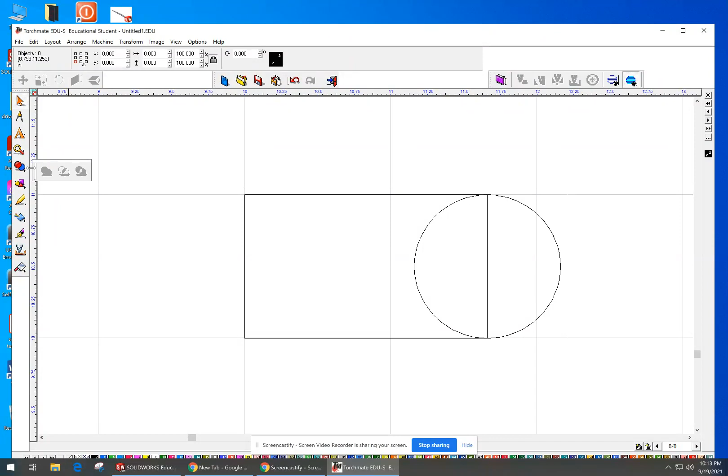What I want to do is weld those together. If you remember back to our other tutorials, we were able to weld parts together. They're gray right now because I don't have anything selected, but if I select both of these parts, I should be able to get my weld commands. And remember, we have the XOR, the AND weld, or the basic weld. For this case, we just want to join these, which would be a basic weld, and we just click that button, and now we have the bottom part of our pawl, okay? And it's dimensioned correctly, and I'm pretty happy with the way that turned out.

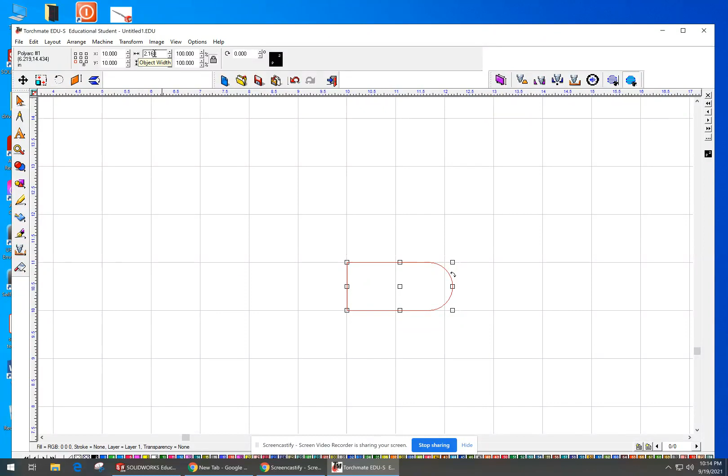Okay, if at any time you need to pause and rewind, that's the beauty of working with this tutorial on video, you can pause and go back, rewind, do this part, get your drawing to this position here. If you wanted to draw this at 0, 0 instead of 10, 10, you could. It doesn't really matter as long as you get the overall shape when it's complete. If I click it here, you'll see that it should be about 2.16 inches wide and 1 inch thick. That's the main one that's really important. If it's a hair off on the length, that's okay, but we do want it to be about 1 inch in height.

Okay. Now, if we look back at the plans, the next part that we have is about 2.5 inches in length, and it is still going to be 1 inch wide. So we're going to start with another rectangle. So go back over here to my shape tools. I'm going to drag in a random shape at first, and my width is 2.41, is what it shows on the plans. You could stick with that. Remember these plans are drawn by a former student, so I don't know that 2.41 was exact. I think we have a little bit of wiggle room. I'm going to just make it 2.5, a nice, easy, round number, and make that the width of the shape, but I do want the height to be 1 inch because I want those to match.

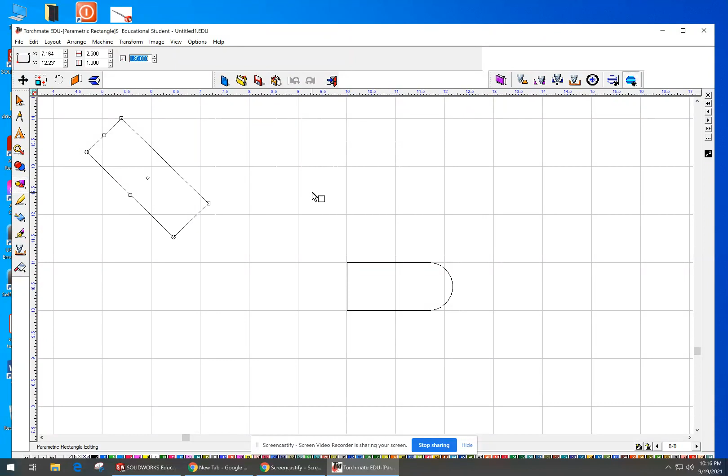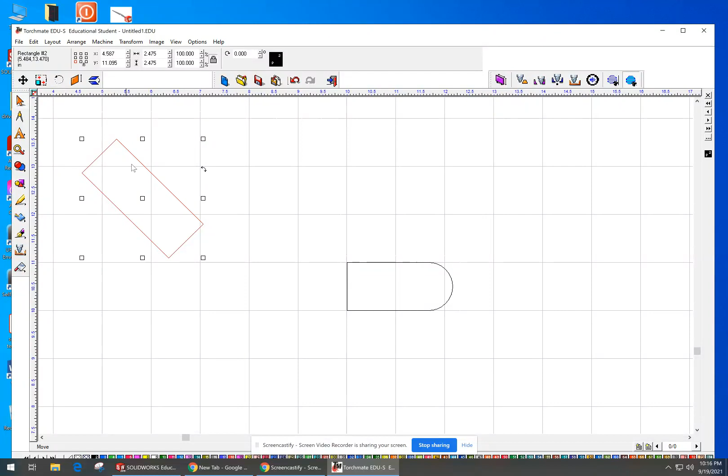Okay. Now, the angle, we want it to be a 45-degree angle, but 45 degrees right here would make an acute angle, and we want an obtuse angle. So I actually want to go 45 on the other side, which would be 90 plus 45, which would be 135. So I'm going to rotate it around to get that angle on the pawl. So I'll click there, and now I have this part, and I can drag it down. Real quickly, you'll see that the width, with my 2.5, changed to 2.47 because it's at an angle, so widest point to widest point, as well as top to bottom. So instead of making this one exact, I'm going to eyeball this one.

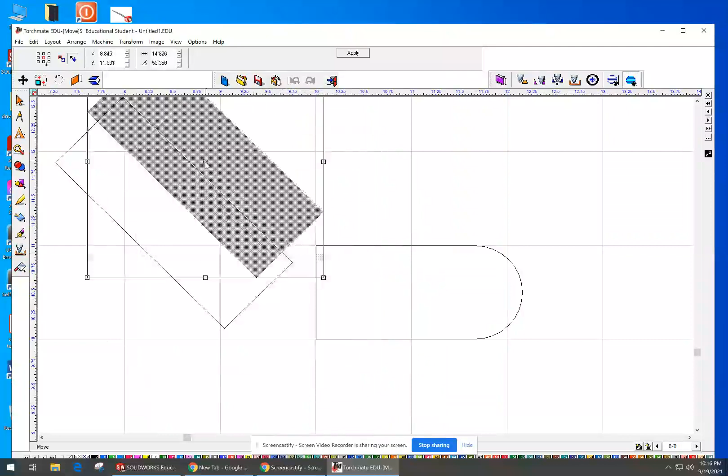So I'm going to bring this down, zoom in on it a little bit, grab it and move it. What we probably should do, so that we make sure we don't end up with a little point height-wise, is click here, and we have the bottom left corner nub, so this is still this nub. Let's make the bottom nub 10, or whatever number you chose to use. That makes this very bottom point and this edge the same.

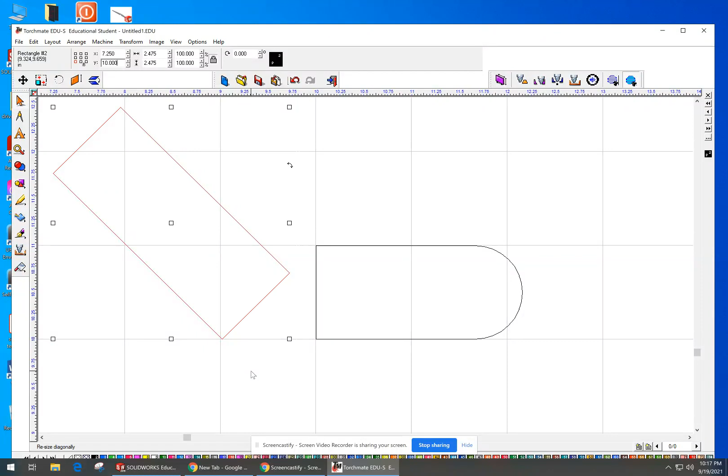So now, rather than use the mouse or the mouse pad to drag and move this around, if we have the part selected, we should be able to hold the arrow. Right now I'm holding the right arrow key down to move this over until it intersects pretty close to that point. Now, I can't type in a physical dimension for this point because it doesn't line up with one of my nodes. This node here is not going to be a value that works for me, and this one is not going to be a value that works for me either.

Now, we could do some trig and calculate that, but we don't need to. We can just eyeball that, and as long as it's pretty close, you're going to be fine. And if you're using the arrow keys, it'll jump around. You have a pretty fine-tuned adjustment, as you can see here. I can tap this key. I'll tap it loudly so you can hear. It's pretty fine-tuned adjustment to get it eyeballed where it should go.

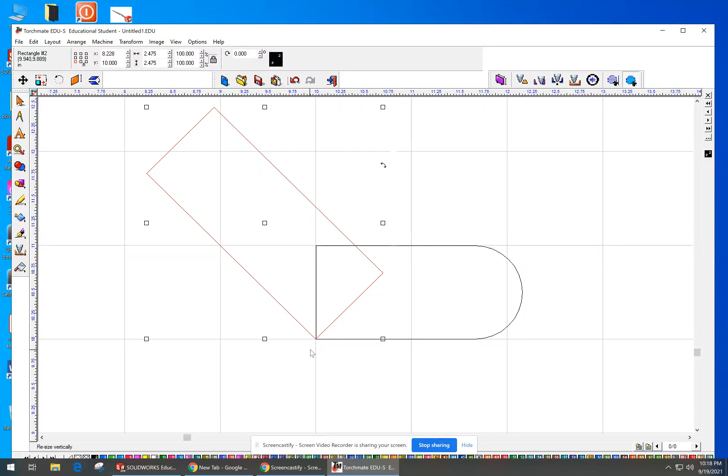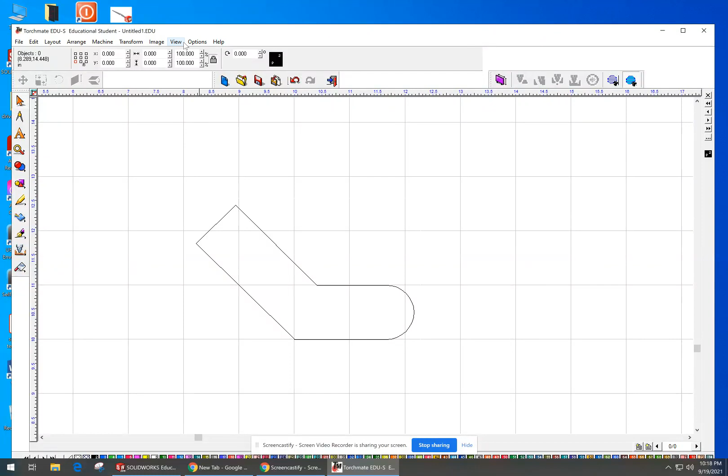Okay? And at that point, I will click off of this part. And I have the two shapes. I want to do a basic weld to get those welded together as well. So I'll highlight both of them and go back here to the weld command, basic weld. And that looks pretty good. Let's go to view and do our show fill material just to make sure that we have those parts correct. And it looks good.

Now you'll notice on the plans that there is a hole in this, but the diameter of that hole is 1/4 inch, and the plasma cutter does not cut a very accurate 1/4 inch diameter hole. We'd be much better off to drill that after the fact, which is what we're going to do. So we're going to weld the 0.625 diameter bar, 5/8 bar, on the side. We'll cut that on the bandsaw and weld it on. We are also going to drill that 1/4 inch diameter hole to mount it to the channel iron after we cut these out. So we're going to cut out the ratchet and the pawl just like it looks here.

So what we want to do now, just like always, is save this guy. And this time I'm going to save it as. I'm going to go back, navigate. This time it defaulted to the correct folder, but remember, you need to always click up here in the save in and drop this arrow down right here and choose your P drive. So not the one that says your name. This one says Timothy Fay. That's incorrect. We are looking for the one that has the P. That's the one I want. That is my P drive.

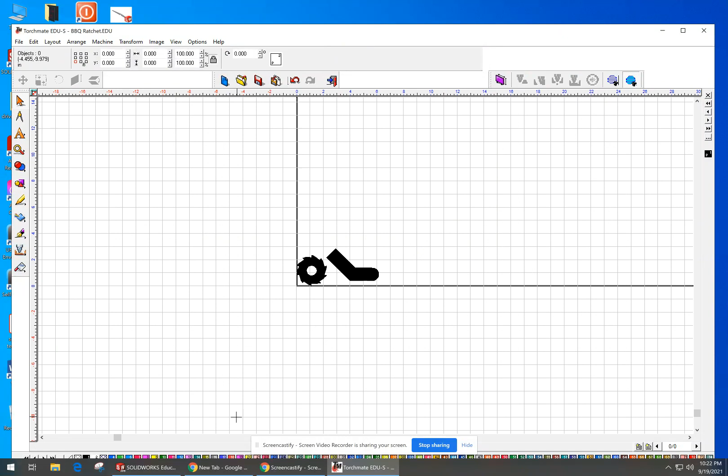So if I wanted to merge them, this is what I would do, the import command. I already have the ratchet open. I want to import the pawl. So I'd go here to my P drive, and I'd go to Metal 2, and I would import the pawl. Click where I want to drop it. Say we want it right there. I could move this now down over to here. And I could save this as BBQ ratchet and pawl.

You don't necessarily have to do this as long as you have the pawl and the ratchet, but it is going to be one extra step when we actually go out to the machine to cut these out. We're going to have to navigate and open up two different files, versus this way I have them both together as a pair, and I can click save. Probably could even play with the configuration to figure out how to save material, what would be the smartest way to cut these out if I'm cutting out multiples of them. But we'll do that together as a class. For now, I just want you guys to create the geometry so that you have everything you need to do these. Okay? If you have any questions, let me know.